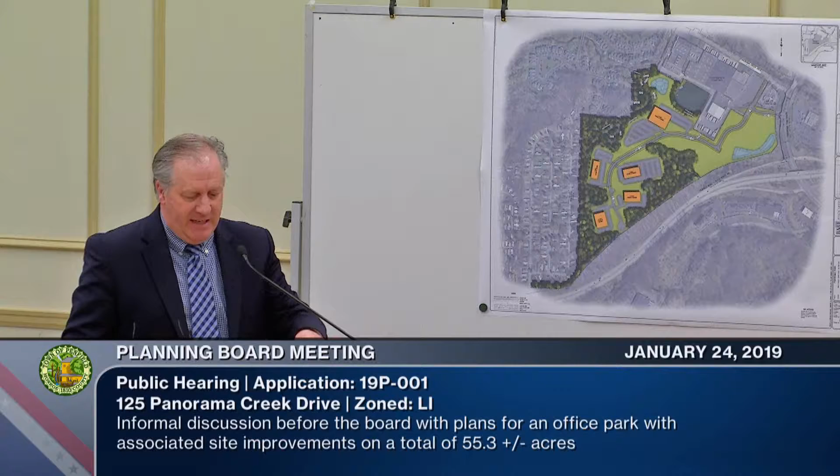The 55.3 acres, to give you a little history of this property, was created as a single tax parcel in 2018 as the owner acquired and consolidated 4 separate tax parcels over the past several years. Some of these you're familiar with, and some maybe not. The first parcels they acquired were those right along Panorama Trail, known as the former Hilton Hotel properties.

Then he proceeded to acquire the former Camp Hakamo lands, which had a separate application not too long ago here. And then he acquired some lands from E.J. Del Monte, which were lands along the 441 right-of-way.

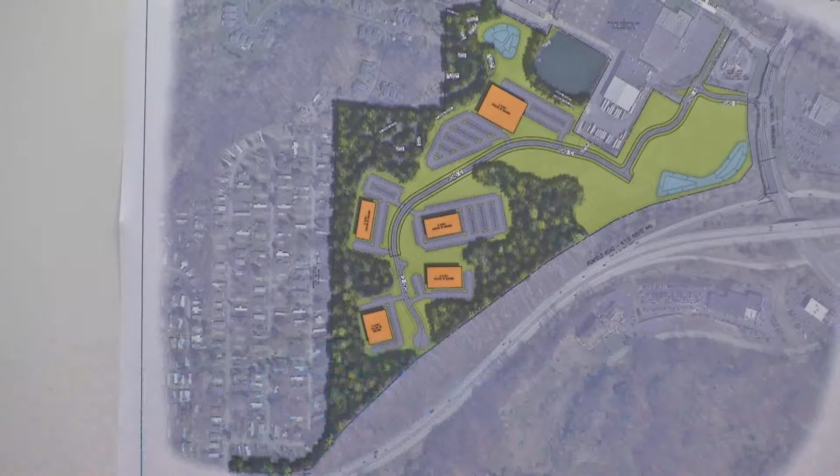And then all of these properties came together when he was able to acquire excess property that Thermo Fisher had. By acquiring the Thermo Fisher property, that provided access to this property off of Panorama Creek Drive, which was very important. It was in 2018 when this planning board actually approved the consolidation of these 4 parcels into the single parcel we have today.

Also in 2018, the town board did issue a grading and EPOD permit to the property owner so that they could do some limited site work on the property to start establishing the future roadway, done primarily so they could begin planning the development, which I'll walk you through this evening.

What's interesting is that by consolidating this into 55.3 acres and one parcel, it really provides a unique opportunity to prepare one cohesive development plan for this property that didn't exist even a year ago. When these were 4 individual tax parcels owned by 4 different owners, there could be no synergy in the planning.

It was the Thermo Fisher property located in this area that was kind of the linchpin to bring them all together. Now we have gone from 4 individual properties, 4 different owners, 4 different ideas and thoughts, to a single property and a single owner with a single vision.

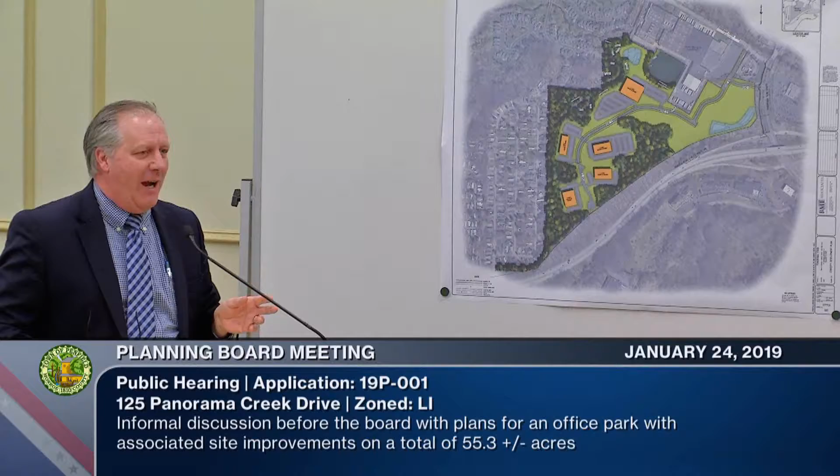The property does contain wood, slope, and flood EPODs, environmental protection overlay districts. Allyn's Creek does clip the northwest portion of the property. There is a lot of topography on this property. The elevation difference from the southwest corner at Panorama Trail to the northeast corner is 140 feet. The elevation at what we call the top of the hill is 420, and the elevation down at Panorama Trail South is 280. So we are talking about a significant grade change from southwest to northeast.

The proposed development at this time would be to develop the road only. The reason for that is so we can individually design future sites on a per tenant or per user basis. We've identified the probable locations of those by analyzing the existing topography, taking into account the slope EPODs also.

What we did after the initial submittal, at the request of the PRC, was complete an initial analysis to get a sense of what the size of buildings would be and the necessary parking to support those users, and what it would start looking like. That's what this rendered site plan shows, which was possibly provided to you this week also.

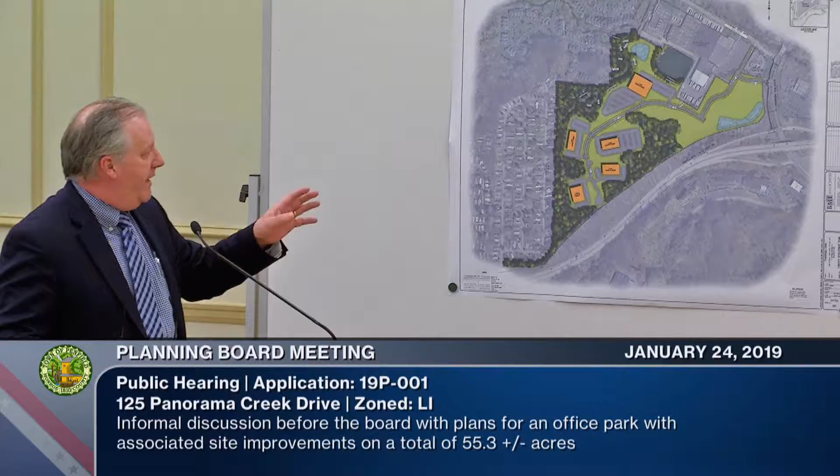What we envision for an ultimate site plan application would be the application to develop the park's infrastructure. It would be a proposed roadway that at this time we'd propose as a dedicated road, with supporting utilities along that roadway—sanitary sewer, storm sewer, water mains. It would include initial grading of the pad areas to help with marketing the properties, and the complete stormwater management plan for the park.

The management plan would involve two stormwater management facilities. One is located here at Panorama Trail—there's actually an existing facility there today, constructed as part of the Hilton Hotel development before that project was suspended. We would expand that to account for the additional development. The second facility would be located at the northwest corner of the property, adjacent to the Camp Hakamo Pond, or the former Camp Hakamo Pond, but most importantly, it's located along Allyn's Creek.

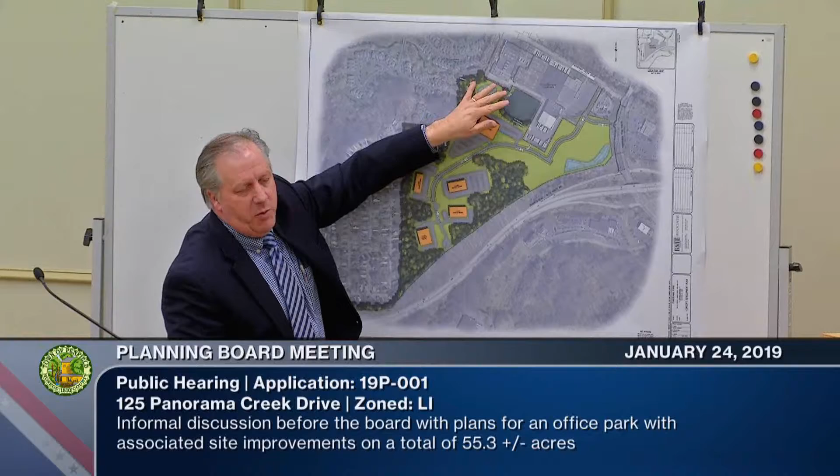This stormwater facility also does another thing. We've prepared this layout—the Allyn's Creek Valley Townhouse development is here. Locating this facility here allows us, with the floodplain, to stay out of the floodplain of Allyn's Creek, and basically moves the development away from the townhouse neighborhood.

With the knowledge that the development intensity is about 350,000 square feet, a traffic study has been commissioned. The scope for that study was established through consultation with the Monroe County Department of Transportation and the New York State Department of Transportation. That study would be submitted with our formal site plan application, and we anticipate it to be complete in the middle of February. We've had initial discussions with Monroe County Department of Transportation, as they govern Panorama Trail South, to develop a probable access plan.

The property now has access off Panorama Creek Drive, which is important because it allows signalized access to Panorama Trail, since the Panorama Creek Drive intersection is signalized. There would also be another access point out onto Panorama Trail South. At this time, the county is allowing that access to be a right in, right out, and left turn in. The only movement restricted would be a left turn out, with the thought being that traffic needing to head north on Panorama Trail South would use the Panorama Creek Drive signalized intersection.

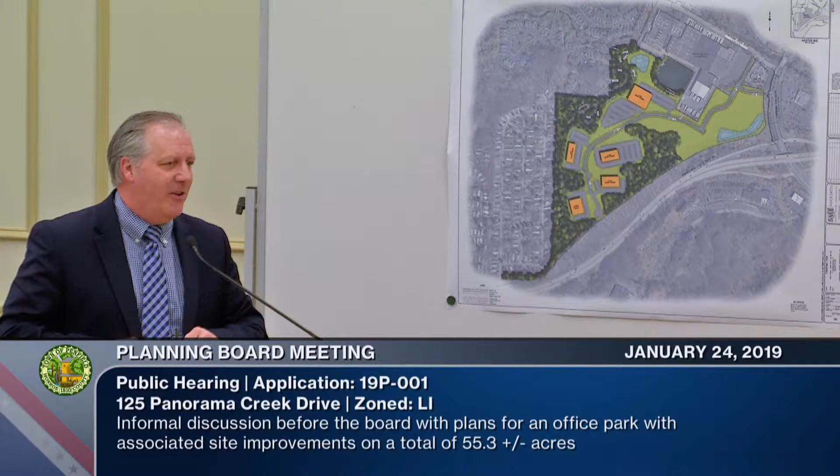Pete, thanks for the presentation. A couple of questions that I have. The first one, buffering and trees - describe what the vision is for maintaining buffering to the surrounding neighborhoods.

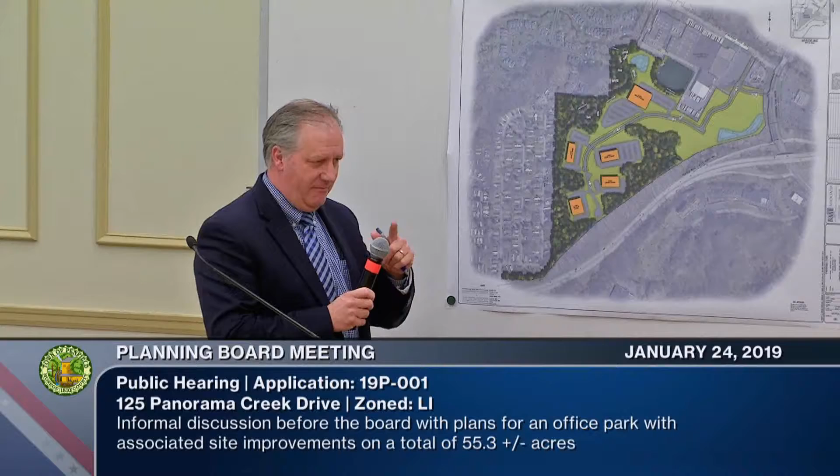So, I'm assuming do you need me to use the mic, Allison? Would it help if it's on? Yeah. Green light, no, power button on the left, right. There we go. Good?

Okay, I'm assuming you're talking in this area here. Yes. We're not as necessarily concerned here. Correct. Okay, so probably the core principle we're identifying here is a 100-foot minimum along this area here. The topography plays a lot in this also, so we're looking at not disturbing a minimum of 100 feet along these property lines.

When we get down into this area, it's still that, plus the addition of, I can show it here, in this area here is the DEC regulated area as it relates to some wetlands adjacent to the Allyn Creek Valley, plus also the floodplain. We have no intent to encroach into the floodplain or disturb that. So these natural features are going to help institute the buffer that would exist here. And then obviously, depending on how properties are developed, as necessary, how we work with the topography, any additional buffering that would be required or desired would get worked into the individual site plan designs.

Okay, thank you. And then where Road A meets Road C at that elbow - that stub, is that in there for access to the proposed development to the east? Yeah, that's primarily what it is there for, is just, until we know how that lays out.

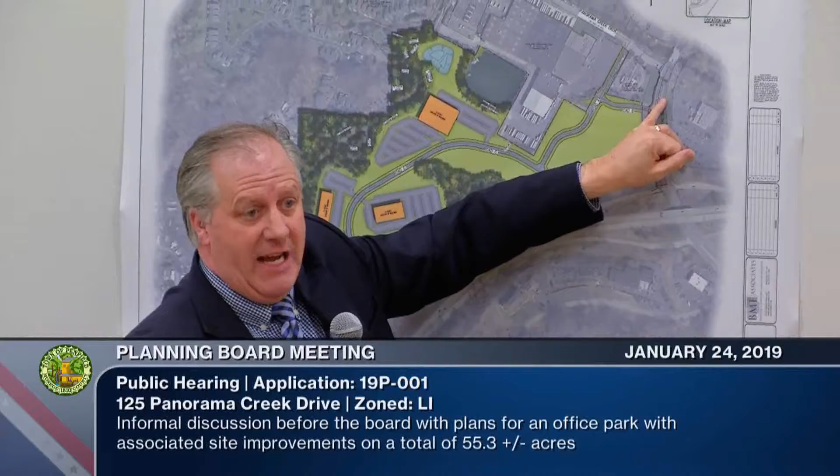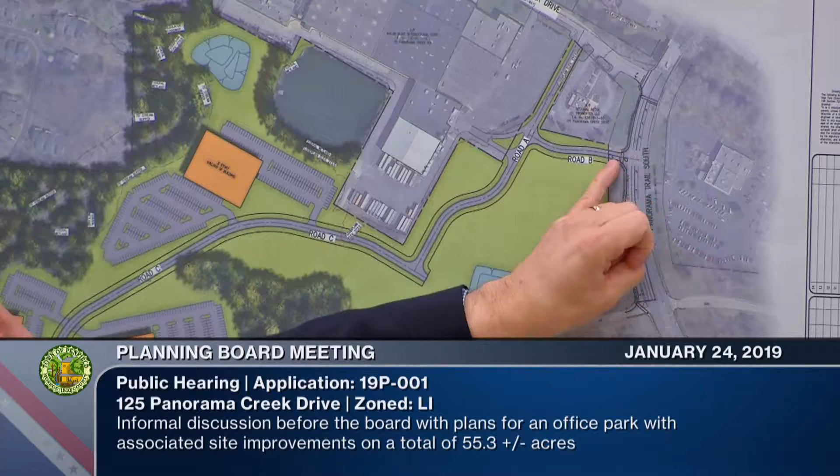One of the primary ways is the functionality of being able to make a left turn out of here. Since this is an office business park, the majority of users will be people there every day, so it won't take long to learn that if I have to go north on Panorama Trail, my best way out is to go to Panorama Creek and get the signal. But the geometry will be designed as the county has provided, because the right turn will be a sweep almost, blending into the lanes as they merge into the 441 access area. There will be a striped left turn lane in, and the county has identified how they want that striped and constructed.

Can you speak to the potential target market of this? You mentioned it was mostly an office park, not necessarily industrial. Are we looking at warehouse manufacturing type applications, or would you rule out anything as it relates to what's allowed under the LI ordinance?

The desire is that this would be Class A office space, but there is the possibility of light industrial flex space. One of the partners in this venture is Rick LeFrois Builders, and if you're familiar with his work out in the Henrietta and Victor areas, he did the Calkins Road campus, and that's probably what we'd see here. That's where Paychex has just now located their corporate campus. They do have some spaces there that are very well done, including some modest assembly space and those types of uses - it is a high-tech use. But all of that would be subject to individual site plan review.

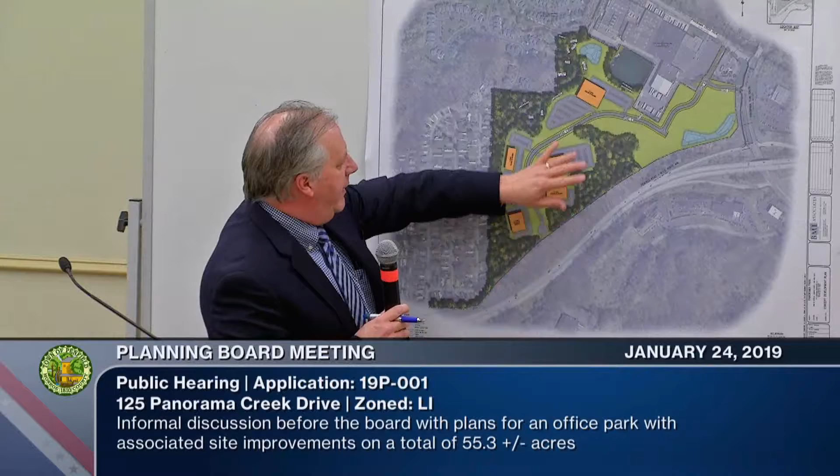I think that we would address that with the application, because it'll depend on whether it's a 2-story or 3-story structure, and everything relates to topography. Case in point, there's 14 feet of difference between this parking lot and that parking lot - this building could lay out as a 2-story or single-story exposure here, with an additional story below. So that's somewhat user-driven, but within the application we'll have grades established and can assume standard building heights to look at how that relates. We'll take that comment into account as part of our application.

The roadway that you show, what do you anticipate the percent of grade of that road to be? This is designed to have a maximum grade of 8%, which is the maximum allowed under the town's dedicated road standard. That's pretty steep. It actually works out pretty well for what was already there, because there was a haul road there for the longest time, and that's basically the pathway we're following.

And you mentioned building out the infrastructure, water, sewer - would that include electric, or would that be done later? Yes, gas and electric would be provided also. That is correct.

Thanks, Pete. I got one question about the traffic. I'm trying to compare it to Linden Oaks, like you said, Peter. You know how they come out of Linden Oaks there, you got like 2 lanes, trying to make the left to get back up the expressway, 441. Visualize that, keep that in mind. So when the traffic comes out, can you explain how that might work traffic-wise?

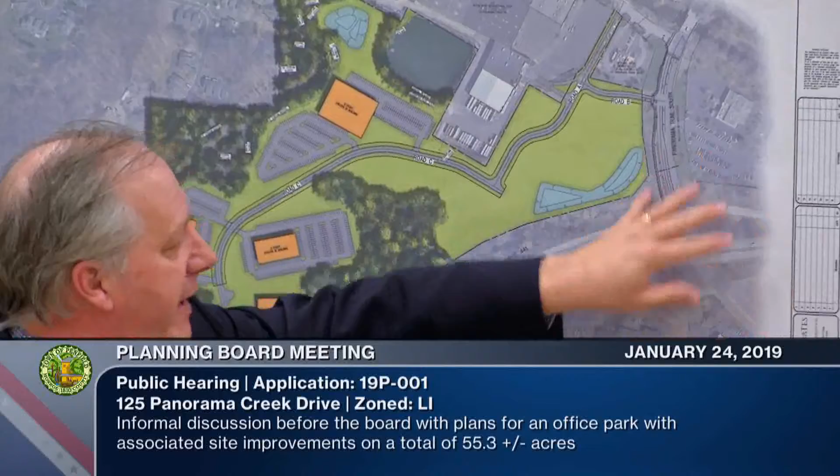But I can tell you, Terry, that the traffic analysis we did, and have been working with the county and the state on, does account for the queuing. They have done all of their field work, so they've analyzed the queuing of this interchange. And actually, the state and the county are comfortable with how this will operate based on how they have it set up and the traffic patterns that are there, and the expected distribution, which is they believe the majority of this traffic is going to want to get to 441.

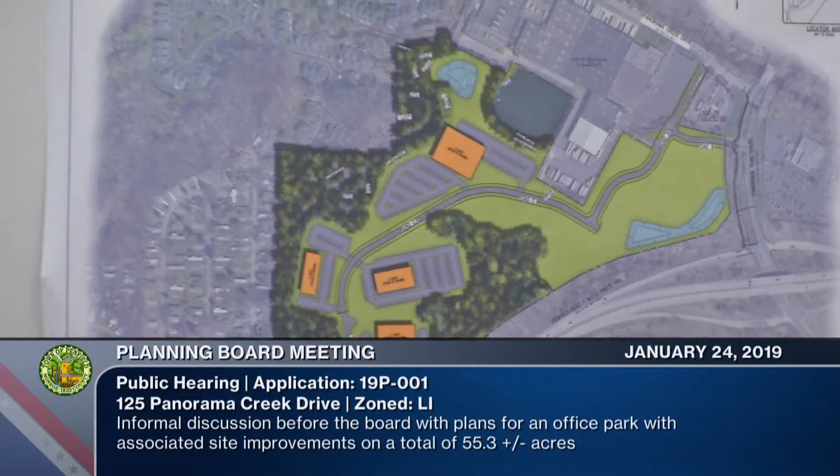But I guess all I would add is that'll be fully detailed in the traffic study that's being prepared.

Peter, do you have a time frame in mind from beginning of building of the roads to the first building being completed? Sure. Well, I could give you the desired timeline. It is the applicant's intent that they would like to construct the road, the infrastructure, and develop the property in 2019. They believe it's very important to get this road in.

Because it's a property that needs to be seen to be marketed. Until they get the road in, they're not going to start aggressively marketing it, because they want to be able to show people where your building can sit within its environment. So it is very feasible that we could see activity here in the latter part of 2019. They're not going to just sit on it, but it is obviously tenant driven, so it's going to be a multi-year development. It's going to take a few years.

Oh, yeah, I would agree with that. So during that time, you're going to have this completed roadway, road A, B, and C. What kind of security measures are you going to put in place so you don't get unwanted traffic, late night traffic, or something going down there using this for a party spot? I don't know, so we'd have to have that discussion with the applicant about that.

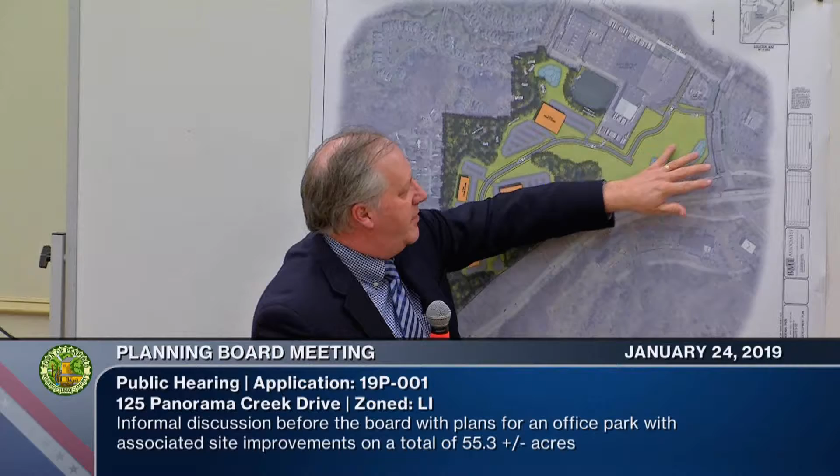Do you have a staging area designed into this plan while you're constructing the roadways and the site improvements? I would believe it would basically be the same area they use during the summer, which is down in this area here, because it suits itself very well for that. It's flat, it's level, it's out of the way. It's actually an area where Thermo Fisher used to store their trailers for a number of years.

And given LeFrois's core business, do you envision all of these to be pre-engineered metal buildings? No.

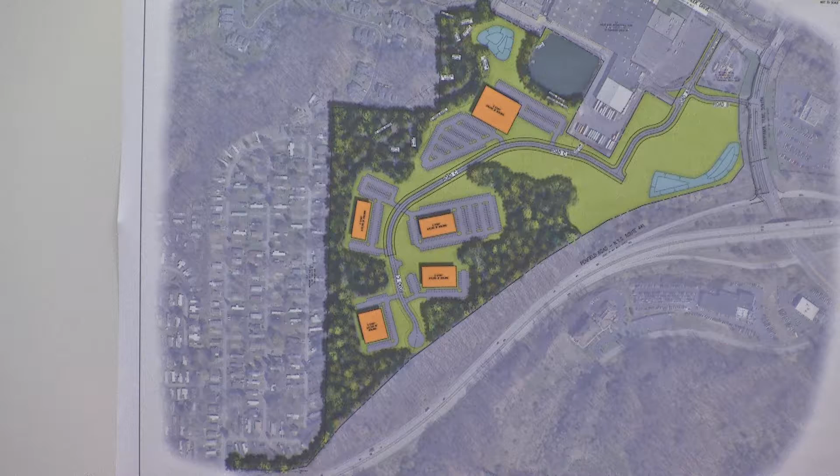So will there be work continuing, putting in pads and everything? Not pads, no. The limit of the work is capped at doing some tree removal, some very rough grading, I'll call it, and the stone access road. You won't see a concrete pad, you won't see utilities going in. As they described this evening, they haven't gotten approval for that yet.

That would take place later this year when they come back to this board with final design drawings that have been engineered for the road, the utilities, and the pad sites of those buildings. That's a separate application that, as the chairman explained at the beginning, would require approvals from the board. What you see tonight is just a concept, it does not receive approvals, just the board's input. So what you see right now is rough grading and that stone road, which they were allowed to do under the town board's review that took place last year.

So is there some sort of an idea as to how close, looking ahead, if the board approves the plans, how close will the building be to our units? It looks like this one would be the closest. How close would a building be to our unit? Especially mine, because it's right on the end.

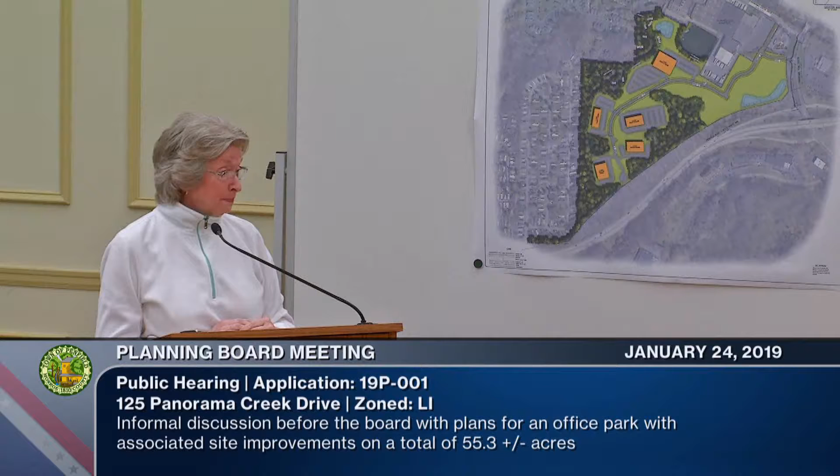I haven't measured it, but the board can ask the applicant that question after you're done to get clarification on that distance. I just don't have it off the top of my head. I know initially it's a minimum distance of 100 feet from all property lines, but in this case it's certainly much more because you have the creek that goes through there, and some wetland and floodplain boundaries that have kind of guided where the buildings have been located. I don't have the specific distance offhand, but we can ask that question when the applicant comes back up.

All right, I guess that's all I have for now. Thank you for your comments. Okay, Henry Simon?

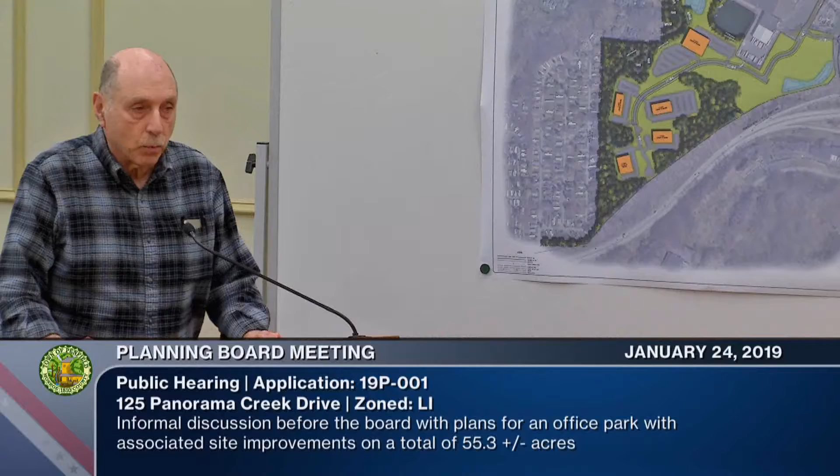Henry Simon, 58 Winding Creek, Marlene's neighbor. Marlene asked most of the things that concern me. I'm having a little trouble orienting myself where our condos are with respect to which property line. That would be helpful if I could see that.

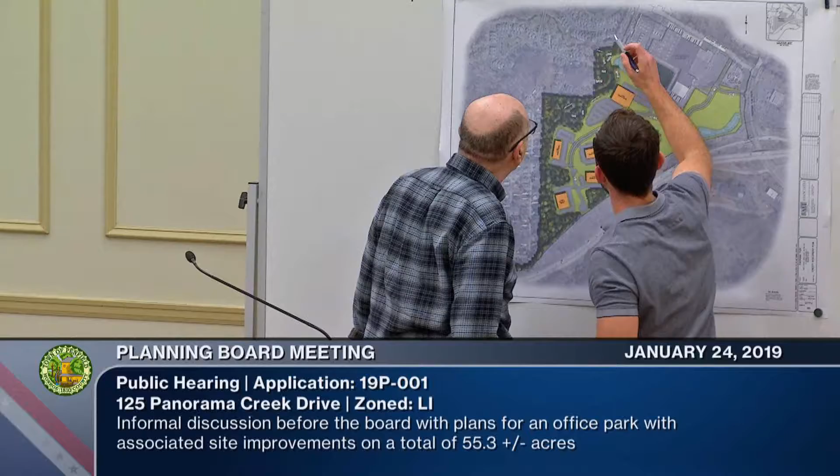Is this the scale? Yes, it is. Just ask the questions in the microphone, sorry. I just wanted to help you point that out.

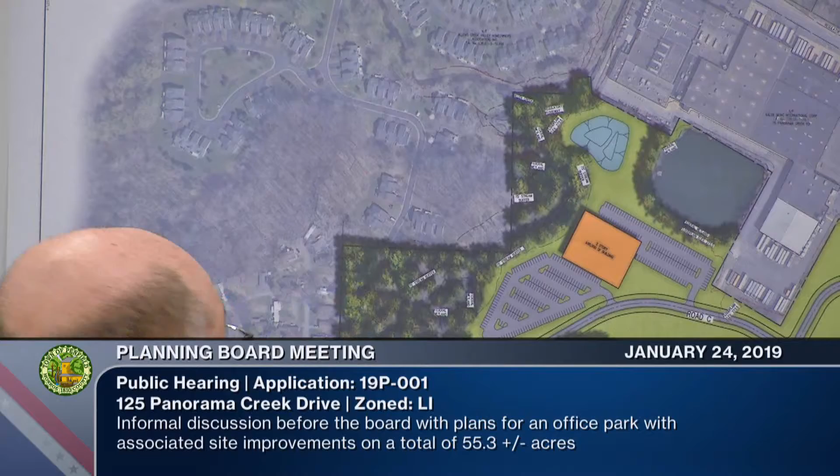So now that I understand where our row of condos are, I'm just curious what the physical dimension is. We are just 100 feet from the property line, so I'm wondering what this tentatively proposed setback is.

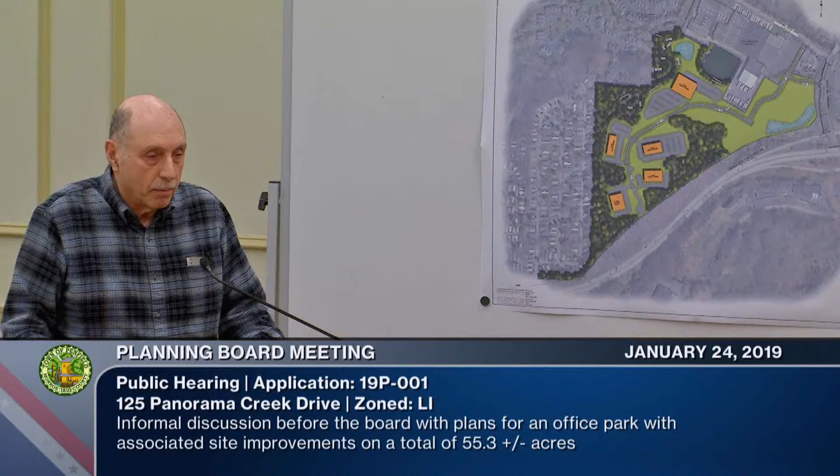Right there? Okay, we can get that answered for you. If you don't mind finishing up your comments, and then we'll have the applicant address what they can. Marlene did an excellent job, that was the only thing that I had left.

Okay, all right, so I hope you guys wrote that down. Would anyone else like to comment? Sir, if you come on up. Good evening, I'm Bob Sandholzer, 57 Waterview Circle. I'm the president of the board of the HOA at Elms Creek Valley. Needless to say, we have more than a casual interest in this development.

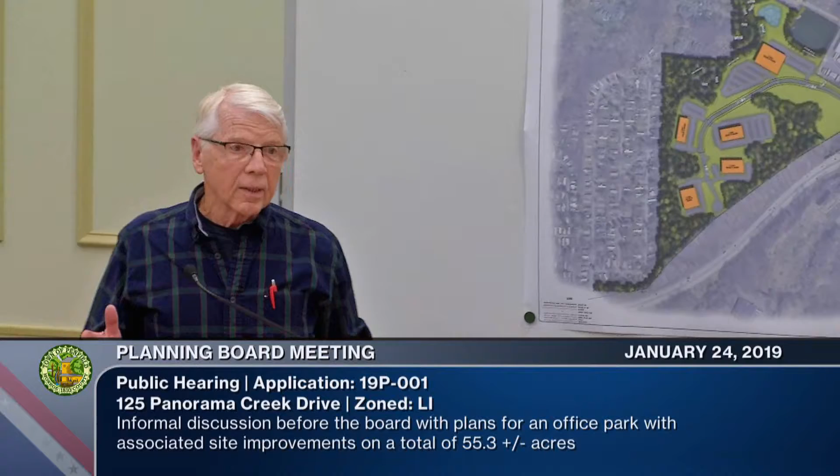I think Marlene and Henry have noted a few of our major concerns, you might call them environmental concerns. Noise would be one, you could say light. We're concerned about the parking lots here. Here is where Marlene and Henry live, they've already endured quite a bit of noise and disruption here. Obviously we would like to have as much buffer as possible from the development. I mean, we're a residential area. It's not just the visual part that says, oh, you're probably this far away, but in fact the noise really does carry, and so we're very concerned about that.

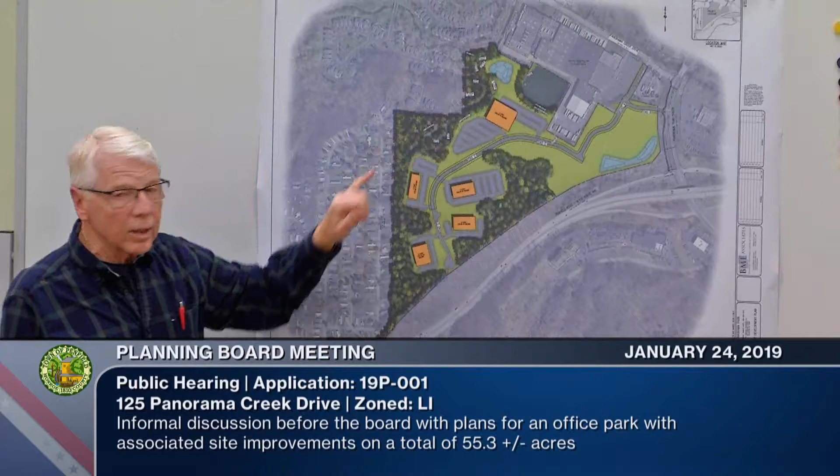We're concerned about lighting, we're concerned about... our primary goal, obviously, as an association is to enhance the livability of our development. Obviously values are one part also. I think it is encouraging to see that we have this buffer here. I live up in this area, so I'm not quite as involved as Marlene and Henry are, but we would really like to have as much buffering as we can.

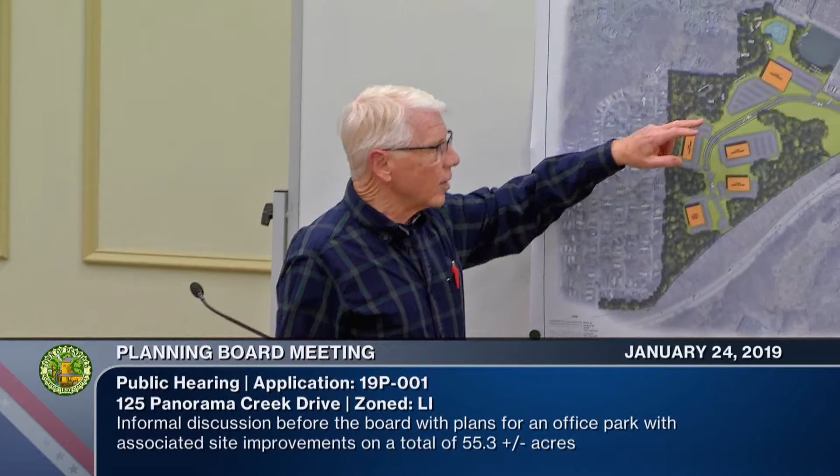The construction hours, that was an issue when they were clearing the land up by Marlene. Got this frantic call that there was some very, very heavy-duty equipment up there. And obviously there still is, so we're concerned about the noise throughout the build-out of this development.

We thought there was 150-foot regulation between, as a buffer, but you're saying 100 feet. So obviously, we would like to see that enhanced and enlarged up in this area for sure.

One of the other things is, of course, as there's a build out, is the garbage pickup in early morning. I think Marlene is hearing the reverse noise from the major vehicles. We can actually hear that over behind Tops in the morning at 4:30, and that's how it carries. So we would really like that kept in mind.

As far as light pollution, I'm assuming that we would have guards on the lighting in the parking lots to ensure that we don't have any pollution there.

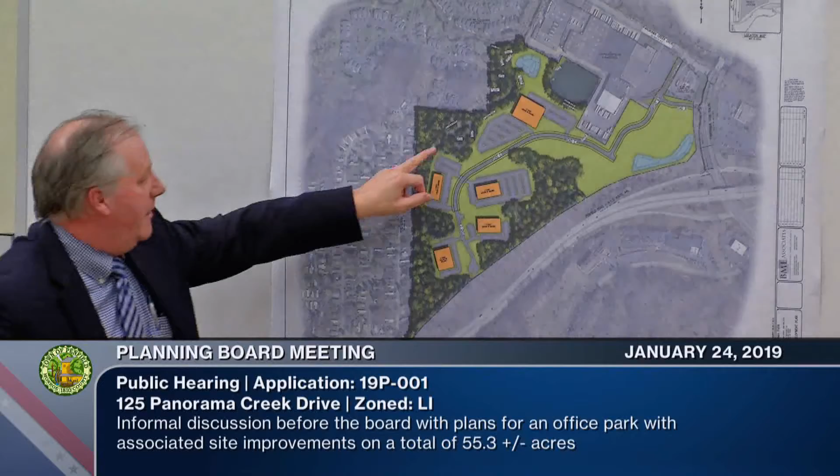Do you have offhand that distance they were asking about from here to those houses? Yeah, that distance. I don't have a scale with me, I would guess. To the parking area here, that's about probably 250 feet from the property line. I know enough about this topography off the top of my head—this building will slide up into this area, so it'll be 300 feet probably that is there.

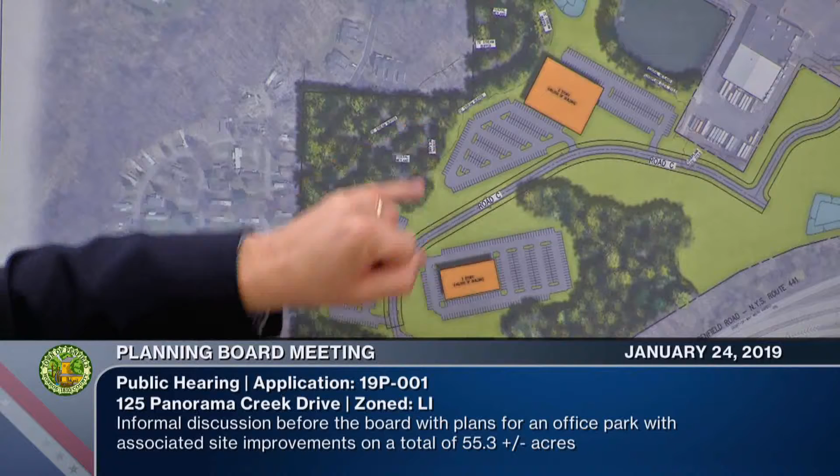I know that this area here is important as it relates to the buffer. As identified on the town's EPOD map, you have a stream corridor identified. So by code, that stream corridor has a 75-foot buffer on it on each side by the EPOD. That is shown on the maps we provided, right through this area. There is also a federal wetland in this area that is delineated on your maps, and by those regulations we can't encroach into them.

So that almost gives a permanence to that buffer just by the regulations of the stream corridor, EPOD, and the federal wetland presence. Okay?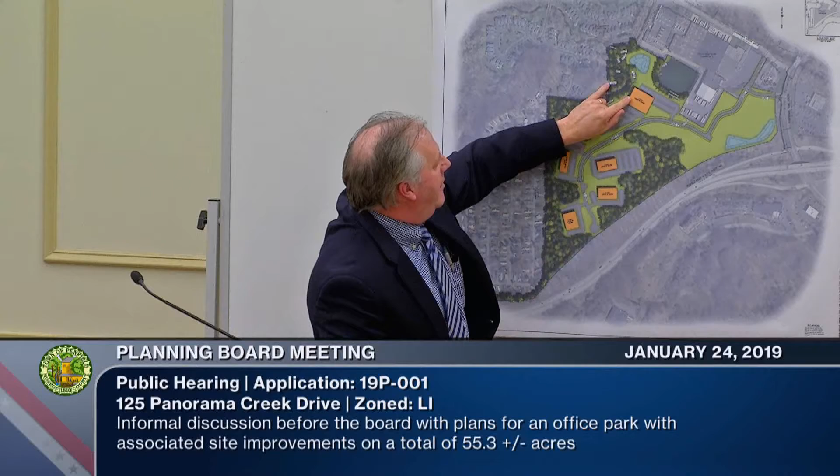And so based on that, the north building, would you say that's about 150 feet from the property line to its nearest corner then? Yes, because it's interesting—this is the width of the complete stream buffer, because that stream does this. So 150? And that's 150, yeah. And that's how that building was set there too.

Thank you for your presentation. Thank you, everyone, for your comments. And we will call this hearing closed. Great, thank you very much.

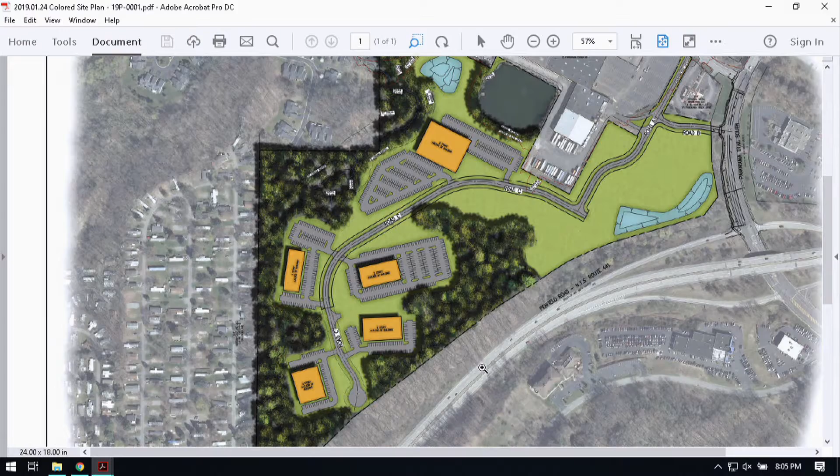I think we can ask, but that doesn't sound like it. Yeah, that's what I took away. It sounds like it's gonna be almost modeled like Linden Oaks. Yeah, at least they want it to be.

If they can attract that, that'd be real nice. I think that's a question they should be prepared to answer for each final application they bring in for each building. I'm not concerned at the next phase, as they outlined.

When they're coming in preliminary overall to do the road, utilities, and pads, obviously that information's not available yet, but we don't want to lose track of that. So definitely want to put it in the sketch letter, so you'd be prepared to discuss that.

Maybe when the final goes in, we should step further and ask them to provide us, clearly they have some kind of demographic study and marketing outline. Perhaps they'd be willing to share that with us so we can get a better idea what the direction is, and you'd have a better way of responding to inquiries from the public.

That's a good idea. All right, we'll put that in the letter. Anything else?

Couple things I would ask for, something we've been looking at as staff, between the plans that came in originally with this application and the updated plans you saw tonight. Just that the applicant, as they're designing their plans, not lose track of these references with regards to the buildings and parking layouts, while they are not final, in relation to what you'll see on the cover sheet of the plan set, where it showed developable area A, developable area B.

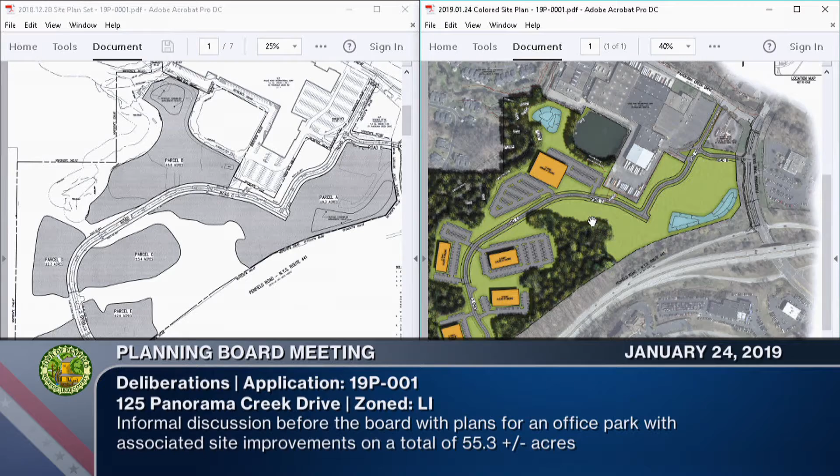That was something we were going to ask as part of the board's comment back to the applicant. And that would have been one of our comments if these had been available when the PRC memo came out. These came in after the fact, so we have not issued a PRC memo based on this. I've gathered those comments for tonight's conversation, and that was the biggest one out of all of it. It's just to ensure that no message is lost between what Doug is showing on the left and the right.

Would it be appropriate also to ask at least what their preliminary building heights are? They're not going to know that now. Up to 50 feet is all, or what the maximum might be for a particular pad? I don't think so. I would say it's probably 50 feet.

The thing is, if you think about this site and where it is, and sight lines from the two major roads, where you're building into a hill, you could have 3 stories, like he said. Linden Oaks is perfect, but we're not going to want to see a 3-story building at the top of the hill destroying the landscape beyond. That's something we could ask for.

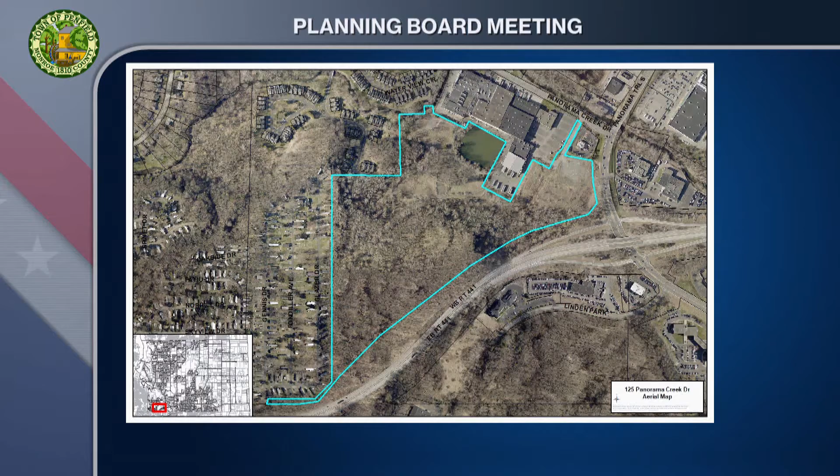Personally, I wouldn't want to put restrictions at this point on designs and possibilities. Just see what comes up through that. That's my view, anyway.

Something I would suggest, since it will be part of the SEQR, is doing a building cross-section, like we did with Allyn Heights, where that worked. You show a max box because you show the height, the rooftop in relation to the treetops and the grade. They're not going to want to do that either, because they're trying to sell this area that's very heavily buffered by natural vegetation and beautiful topography.

You buy a building or a lot there and put your business, you want it to be nice if you're going there. And you want it to be consistent. You want to make sure that the next building up the road, they're not going to do something different.

If their goal is 350,000 square feet with those 6 buildings, 350 total with this here too and that there. So this, I think, is 250 and this is 100, or something like that. Which one's 100? The area where the hotels were going to be.

That'd be more of a retail restaurant type, which is nice for Thermo Fisher, people who go to lunch and don't have to go very far. But with that, we should make sure that there's sidewalks that go up the hill and down the hill. Pedestrian access.

Yeah, because they don't have that in Linden Oaks. You walk down the road, that would have been nice because it's such a nice park setting back in there. A lot of people want to walk at lunch, it'd be a beautiful place to walk. Oh yeah, that's a real good comment.

Is it too early for me to ask if you're supportive of both sides or one side? On both sides, probably, since you've got buildings on both sides. Yeah, just wanted to ask.

Now, Thermo Fisher, they run 3 shifts, right? I believe so, yes, they're 24/7.

Can I rewind back to my cross-section comment? Is that something you'd like to see with some future conceptual plans? Yeah, conceptual. I think it's part of the visual analysis when it comes to SEQR, absolutely. So I think that would benefit the board to have that right away. Yes, sure.

Any concerns on that grade, road grade? Not really. 8%, it's within our design code. Anything more than that, it would have to be a private drive. But if you try to alter it too much, you may run out of room with some of the topography out there. You're creating a lot of navigation issues trying to create 5% grade, that's nearly impossible on that site.